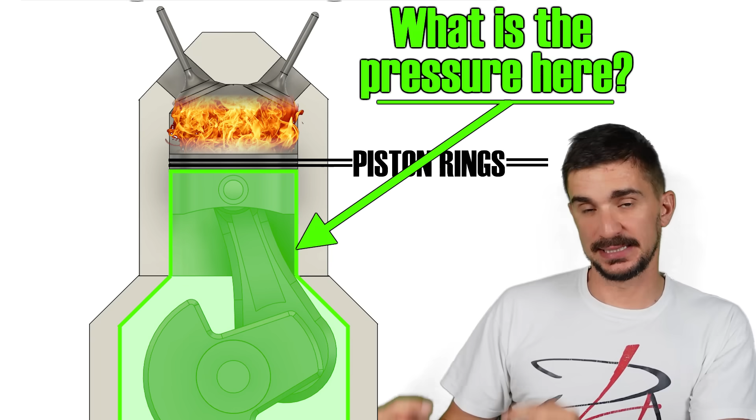Allow me to start this video with a question. Here we have a running 4-stroke engine, and let's imagine combustion is occurring inside the combustion chamber, above the piston rings. The question is, what is the pressure below the piston rings inside the crankcase? Is it A, the same as atmospheric pressure, B, higher than atmospheric pressure, C, lower than atmospheric pressure, or D, all of the above?

Time's up. The answer is D, all of the above. How can it be all of the above? It can be all of the above because pressure inside a crankcase fluctuates. It can be both higher and lower and the same as atmospheric pressure. In this video, we're going to learn and explain why that is not really a good thing, and why what we ideally want inside a crankcase is C, vacuum, lower than atmospheric pressure.

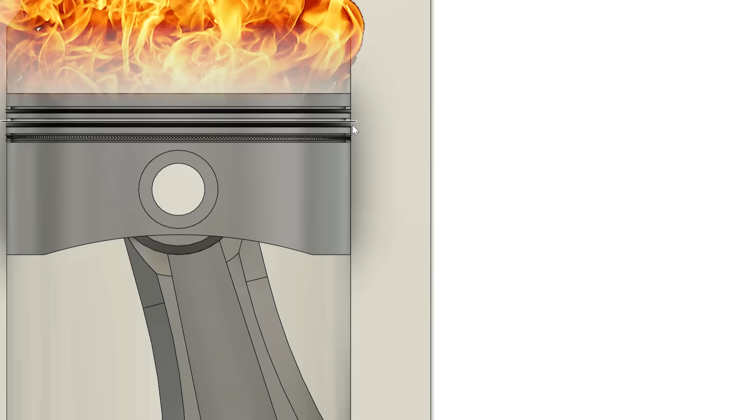So why does pressure inside a crankcase fluctuate? It fluctuates because, number one, engines have piston rings, and piston rings cannot create a perfect seal. Number two, engines have a PCV, or positive crankcase ventilation system. As combustion occurs inside a cylinder, there's always a little bit of blowby, meaning tiny amounts of combustion gases escape past the rings and go into the crankcase.

As these gases accumulate inside a crankcase, they increase the pressure inside it. If we allow these gases to increase without control, then the pressure would increase without control and we would blow out seals and send dipsticks flying out of the engine.

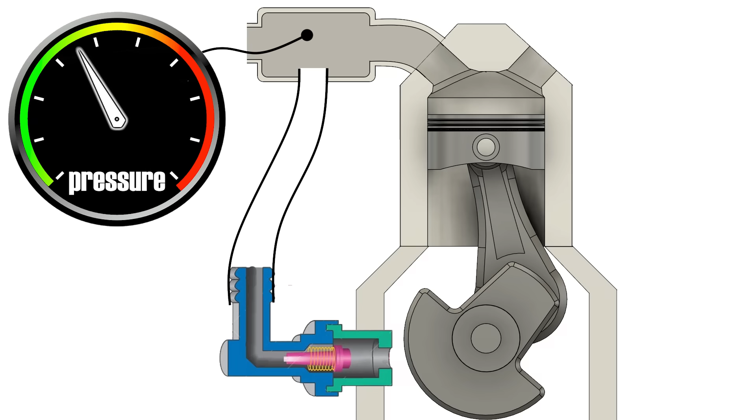This is why we have a PCV. A PCV is a simple system that essentially consists of some hoses and a valve. The hoses are connected to the crankcase and the intake manifold, and the valve sits in between. The valve opens and closes depending on the pressure inside the intake manifold, and allows excess pressure to escape from the crankcase and these gases to be recirculated back into the engine.

So basically, when the PCV valve is open, the pressure is slightly below atmospheric, and when the PCV valve is closed, pressure is slightly above atmospheric. In reality, crankcase pressure constantly fluctuates as RPM and manifold pressure change, but these fluctuations are absolutely minimal. While this is technically the correct answer, crankcase pressure can typically only go something like 5 to 10 millibar above and below atmospheric.

So technically, D is the correct answer, but really you wouldn't be wrong even if you answered A, atmospheric pressure, because the fluctuations are absolutely minimal. But as we said, that's not ideal. What we ideally want is C, vacuum, and we want significant vacuum, something like half a bar of vacuum if possible. Of course, a conventional PCV system can never hope to achieve anything near that. The only thing that can achieve such high vacuum is a dry sump system.

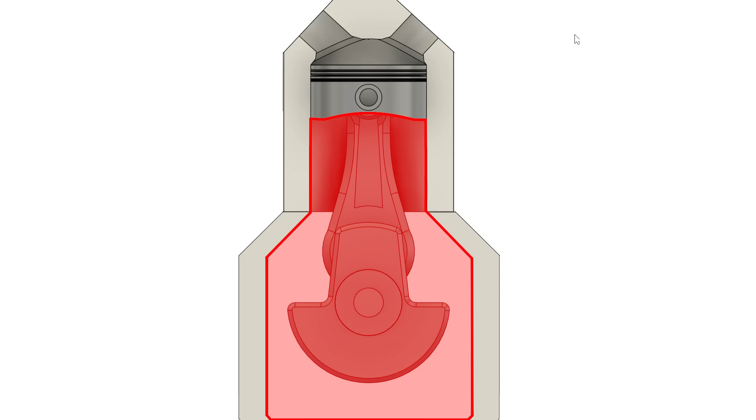So why do we want vacuum inside a crankcase? Because vacuum in the crankcase means more power. If you observe an engine in operation, you will see that the volume of the crankcase is constantly changing. This is the volume of the crankcase when the piston is at top dead center, and here's the volume when the piston is at bottom dead center. As you can see, these volumes are very different.

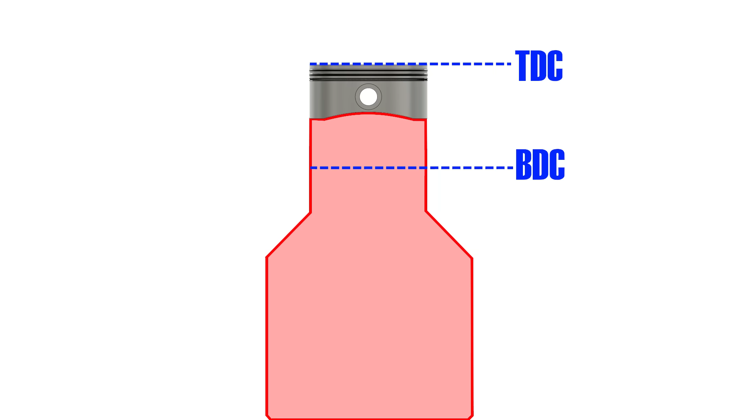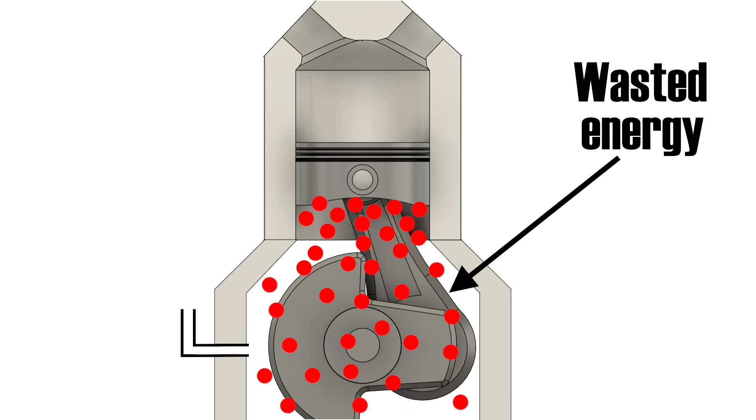This tells us that when the piston goes from top to bottom dead center, it must work to push a large amount of gas through the PCV or crankcase breather. Of course, it's impossible to push a large amount of gas through a tiny hole rapidly, so the piston ends up wasting some of its energy on compressing the crankcase gases and increasing their pressure.

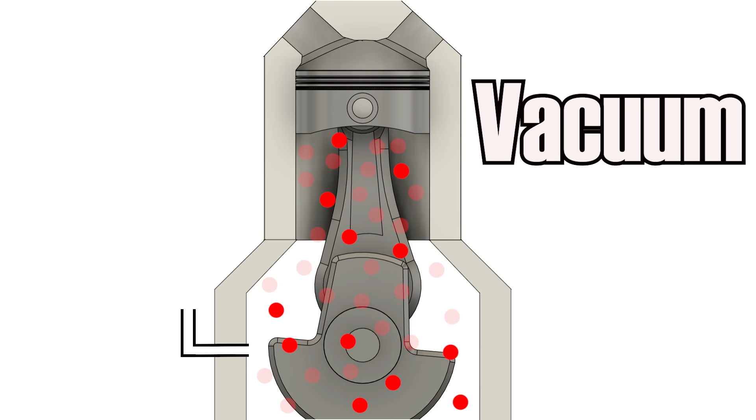This can be especially problematic on engines like 360-degree twins or boxer twins, where we have a massive change in crankcase volume because both pistons are at top and bottom dead center at the same time. But if we create vacuum inside a crankcase, then there's a lot less gas to compress and much less energy wasted. In fact, energy is gained because now the downward travel of the piston is made much easier. A vacuum means there is much less resistance.

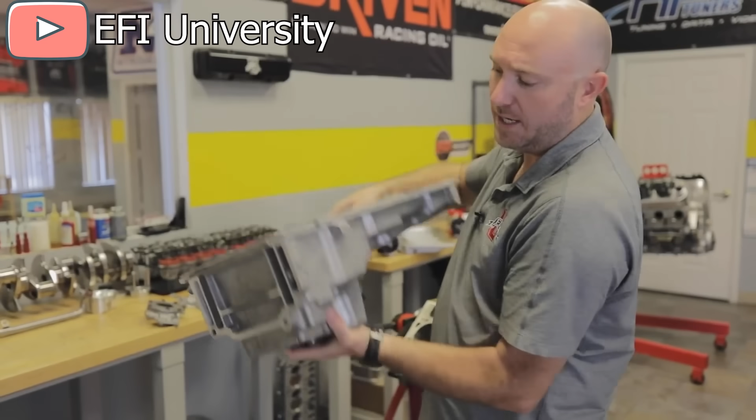This is why if you throw something in space, it will keep traveling at a constant speed forever. There's no gravity and there's no air resistance. Outer space is a perfect vacuum. And how does a dry sump system achieve vacuum in the crankcase? By sucking everything out. So instead of a traditional deep wet sump that stores all the engine oil, we are going to have a very shallow sump or oil pan.

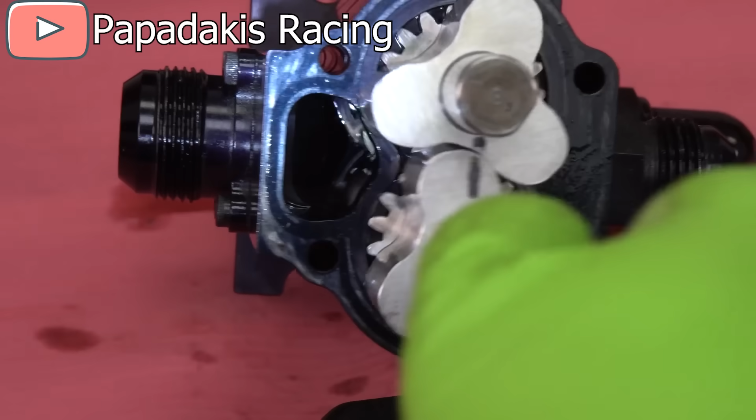Instead of an internal oil pump, we will have a belt-driven external oil pump hooked up to the crankshaft pulley. So the pump runs whenever the engine runs, and pump speed and pressure increases as engine RPM increases, just like a conventional oil pump.

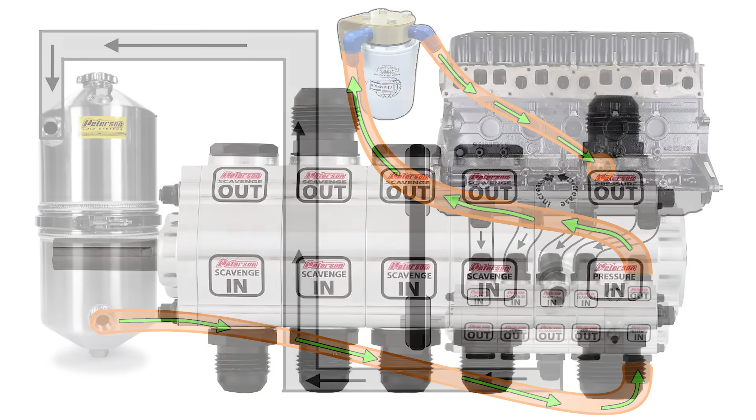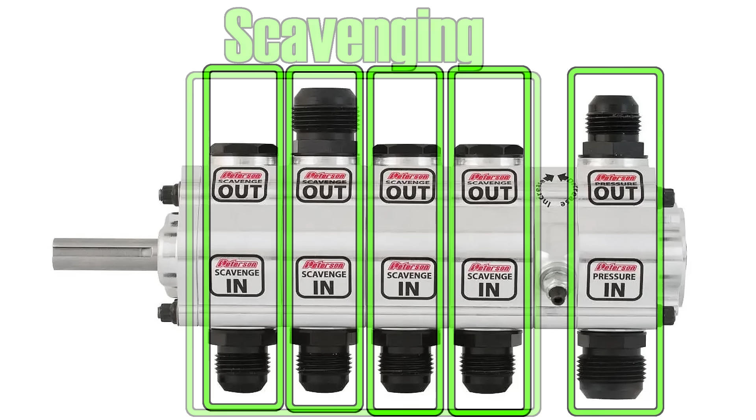This external pump scavenges or sucks oil out at multiple spots in the shallow oil pan, and then sends that oil into an external oil reservoir. At the same time, it takes oil from that reservoir, pressurizes it, and feeds it back into the engine. These are called pump stages. The first one will almost always be pressurization, and the remaining ones will be scavenging or suction. The more stages we have, the higher the vacuum inside a crankcase we can create.

Okay, but this looks like a lot of extra parts and hoses and complexity just to achieve crankcase vacuum. Is it even worth it? Yes, it is, because crankcase vacuum is just one of the many benefits that a dry sump system achieves.

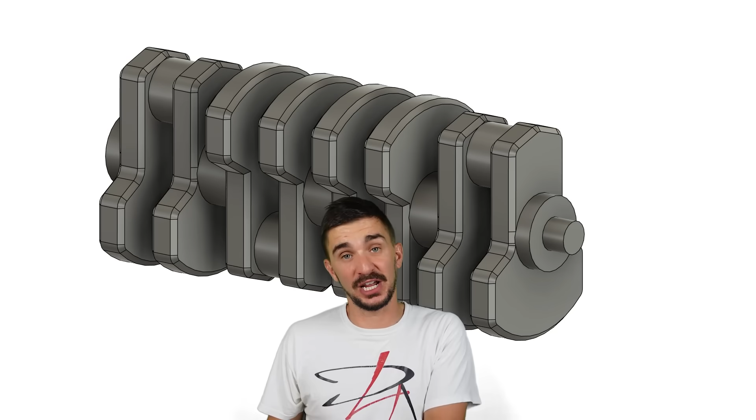The next important benefit of a dry sump is that it makes the life of the crankshaft a lot easier. If you ever opened a car window on the highway and stuck your hand out, you have probably noticed how air resistance acts against your hand.

Typical legal highway speeds are between 120 to 130 km per hour, but the crankshaft spins even faster. Depending on the RPM and the radius of the crankshaft, a point on the edge of the counterweight can reach speeds of 200 km per hour or even higher in some cases. So you can imagine the air resistance the crankshaft faces all the time.

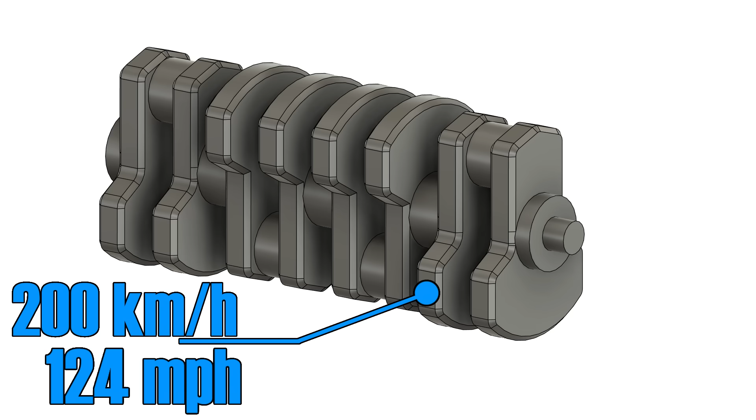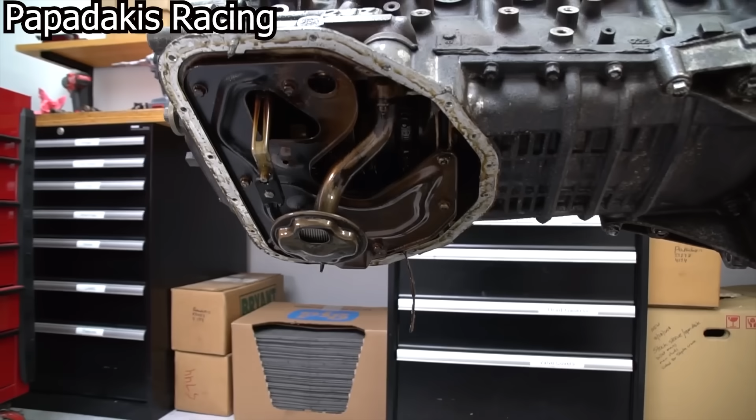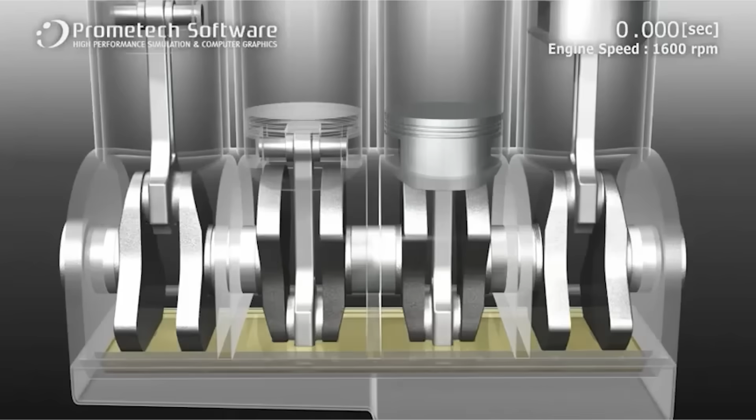But the problem is made much worse by the fact that the crankshaft doesn't spin in an environment of only air. In a conventional wet sump system, the oil drains from the rotating assembly down into the sump through the force of gravity. As the oil falls down, it of course passes by the rapidly rotating crankshaft, which then acts like a blender and creates a chaotic tornado of air and oil.

So the counterweight edges traveling at 200 km per hour have to push through this environment of air and oil droplets all the time. This, of course, is another power-reducing loss.

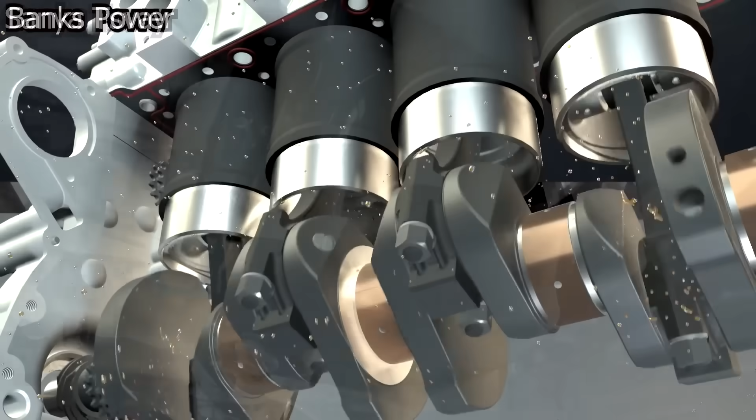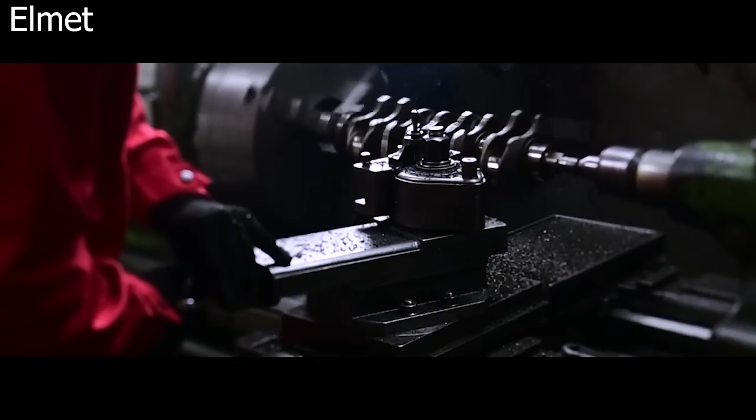This is why some people modify their crankshaft through what is known as knife edging. They cut the ends of the counterweights to hopefully make them more aerodynamic and reduce windage losses. And while this can help in some cases, it is ultimately a band-aid fix because it does not address the source of the problem. But a dry sump system does.

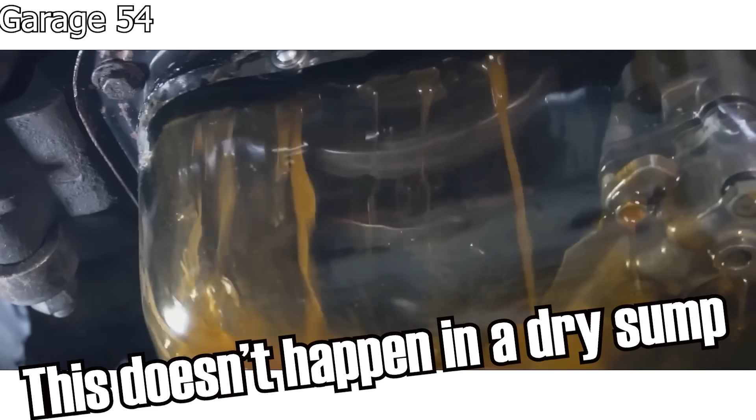In a dry sump system, the oil does not stream down from the rotating assembly via gravity. It is actively sucked out of the engine crankcase. In other words, it doesn't spend enough time, and it's not present in a sufficient quantity in order to be churned up into a froth by the crankshaft. And because we create a vacuum inside the crankcase, the crankshaft doesn't have to fight as much air resistance.

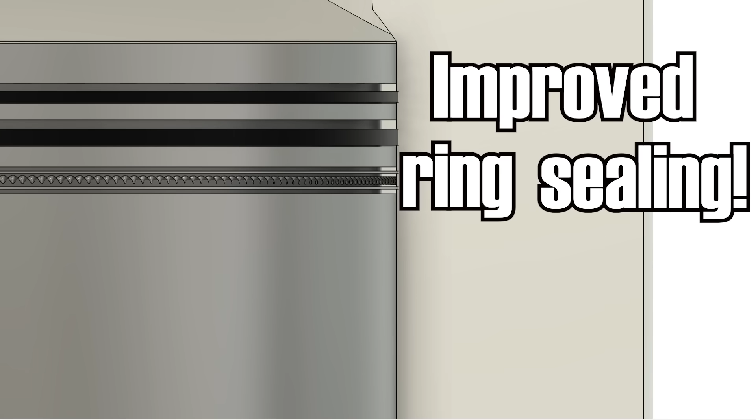But it's not just the crankshaft that benefits. The piston rings benefit as well, because a dry sump system improves ring sealing at high RPM when blow-by is highest. In a conventional engine, when the piston goes down, it briefly compresses the gases in the crankcase and increases pressure. This increased gas pressure pushes back against the piston rings, making sealing worse.

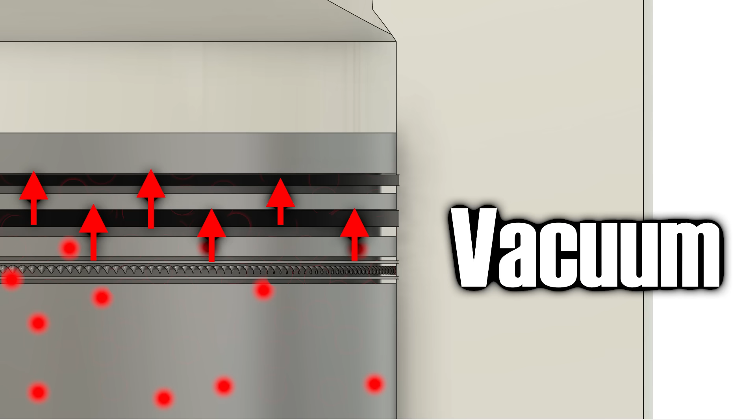But if we have a vacuum inside the crankcase, then there's nothing pushing back on the rings, and they are free to release all their tension on the cylinder, making ring seal better and improving compression and power, and also reducing emissions. All of this means that at high RPM, a dry sump system can increase peak power output by 5 to 10%, depending on the size of the engine and how much vacuum is achieved in the crankcase.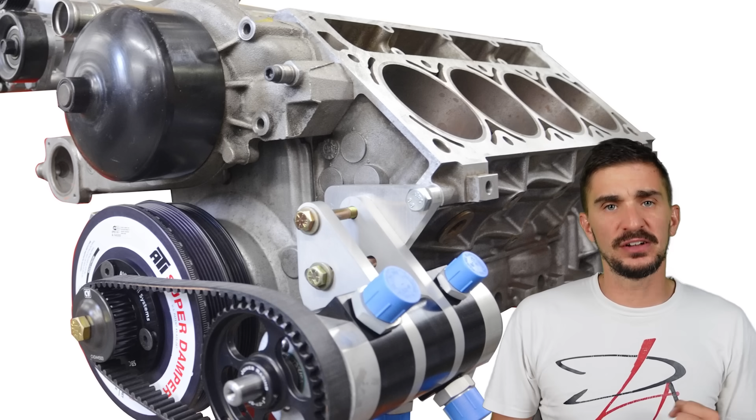So if you have an engine making 500 horsepower, then you can increase peak power by anywhere from 25 to 50 horsepower. And this is made even more impressive when you consider that the dry sump system is essentially a parasitic loss. It is a belt-driven pump.

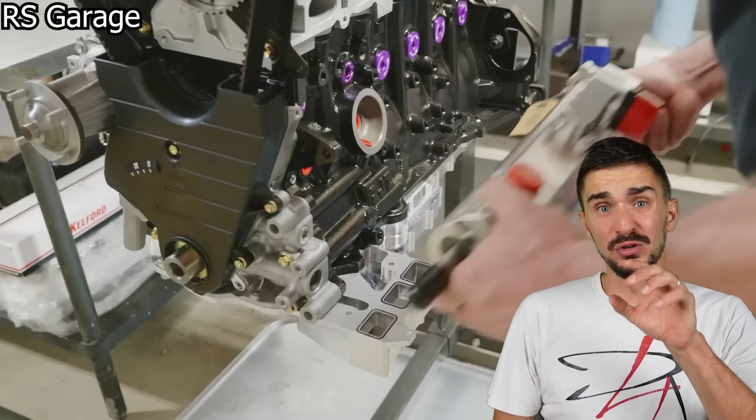A multi-stage setup is especially bad because it has multiple pumps on a single shaft driven by the engine. So for example, if you have a 7-stage dry sump system, then you have 7 pumps, 7 rotors on that shaft. But the parasitic loss from those 7 pumps is still less than the pumping and the windage losses inside the crankcase, which is why a noticeable net power gain is achieved.

But this is still just the beginning of the benefits of a dry sump system. Something else that's very important that a dry sump system achieves is that it helps the engine run cooler.

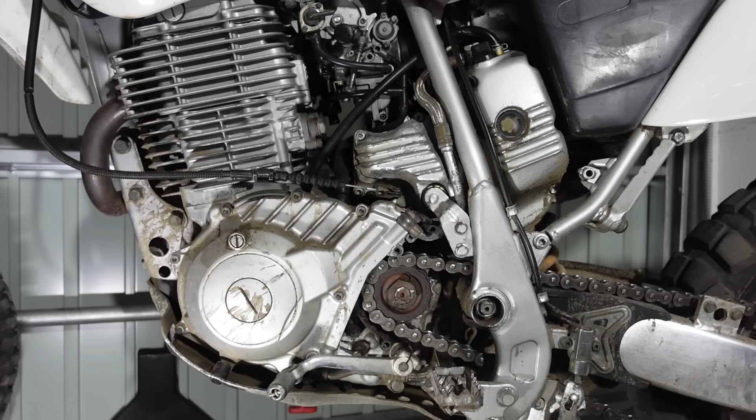This is a 2000 Yamaha TT600R and it has a super simple dry sump setup. Here's our engine and here is our external oil reservoir. Oil is taken from the engine via this hose and deposited in the tank.

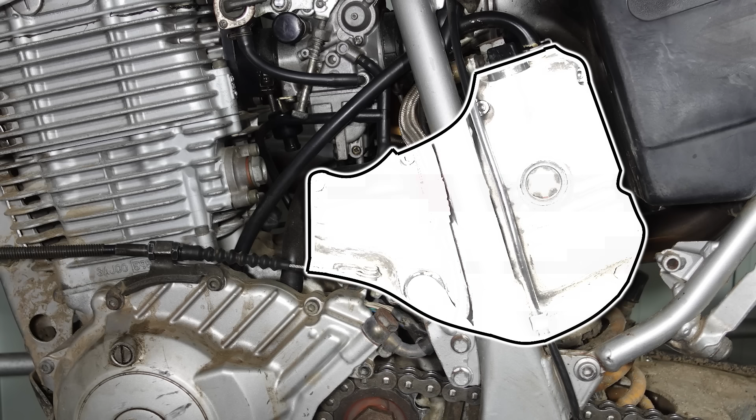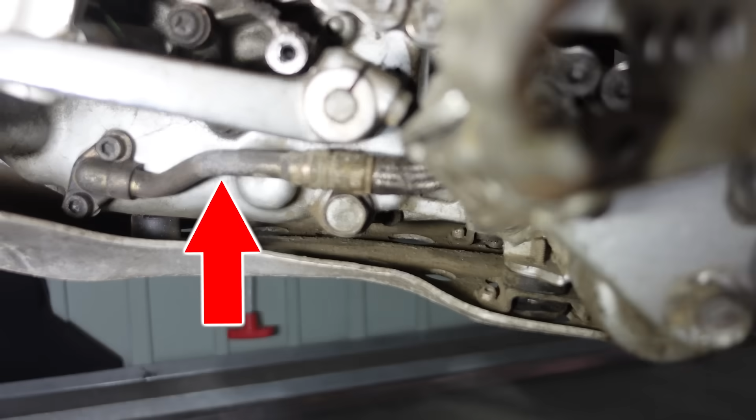The oil gets deaerated in the tank. In other words, the air and oil froth is separated into air and clean oil. The vapors return to the engine via this hose, and the filtered deaerated oil collects in the tank. From there, it goes through this hose at the bottom of the tank, back down into the engine, and then it's forced into lubrication passages by the oil pump. So basically a dry sump system just like on any other vehicle.

But the fact that here we have just one single stage pump means that this system is not capable of achieving significant vacuum in the crankcase, which means that here the goal isn't to increase power. Here the goal is to increase oil capacity.

This is a 600cc engine, but it has 3 liters of oil capacity. Compared to my daily driven Kia, which has a 1.6 engine, but only 4 liters of oil. So a 166% larger engine only carries 33% more oil.

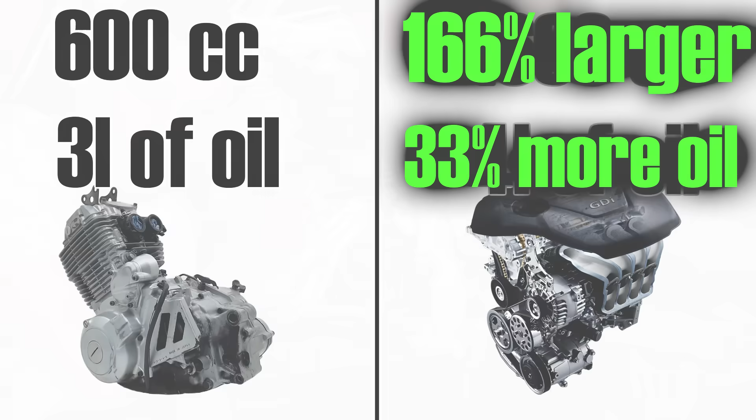An air-cooled off-road motorcycle like this one greatly benefits from increased oil capacity because it takes more energy, more heat to overheat a larger quantity of oil. Just like it takes more heat, more energy to boil 3 liters of water than just 1 liter of water.

It's pretty obvious. A bike like this has been designed to traverse rough terrain at slow speeds, and it's air-cooled. That sounds like a recipe for overheating. So we get an external oil tank to carry more oil to prevent overheating. And I have recently confirmed this because I have traversed some pretty rough terrain on a very hot summer day, more than 30 degrees Celsius, and this bike never showed any signs of overheating.

Another, just as illustrative but probably much more famous example of increased oil capacity through dry sumps are classic air-cooled Porsche 911s. They had air-cooled flat-six engines in the back, so not very good airflow by the anatomy of the vehicle. These engines had a displacement of anywhere between 2 to 3.8 liters, but they all had dry sumps and an oil capacity of anywhere between 9 to 14 liters of oil to ensure that the engine never overheats.

But wait, there's more. It's not just more power and temperature control. Another benefit is engine protection. The easiest way to kill an engine is to starve it of oil. And in a conventional wet sump system, an engine that is properly filled up to its specified oil capacity can still be starved of oil.

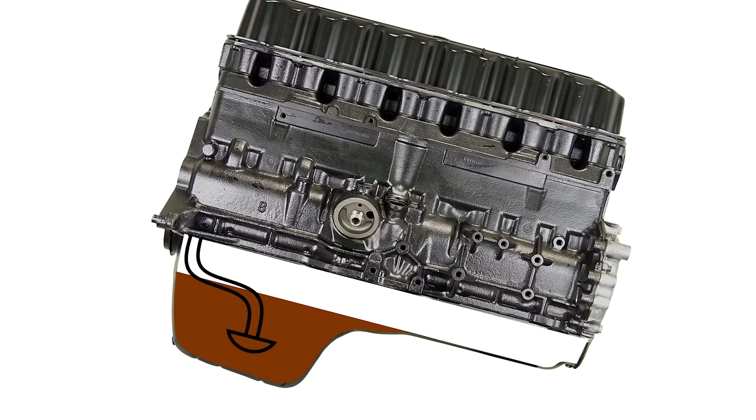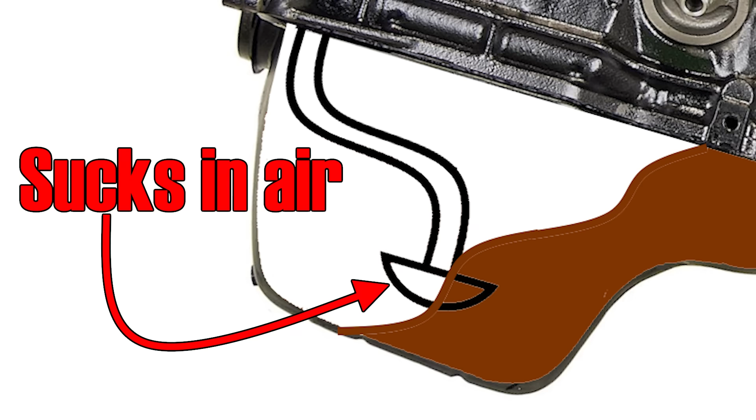Here's our engine, here's our sump, here's our oil pump pickup, and here's our oil. Now let's imagine our vehicle brakes very hard. When that happens, all our oil will be pushed to the front of the sump, and during those short moments, the oil pump will ingest air through the pickup tube, leading to temporary oil starvation and potential engine damage.

Of course, the same thing can happen during hard cornering, when all the oil gets sloshed to the side, or during very hard acceleration if the vehicle is capable of it, when all the oil gets pushed to the back of the sump. Now, sump baffles, they can help with this, but they still do not address the source of the problem, and that is the fact that the oil pickup must be fully submerged in the oil at all times to guarantee oil delivery.

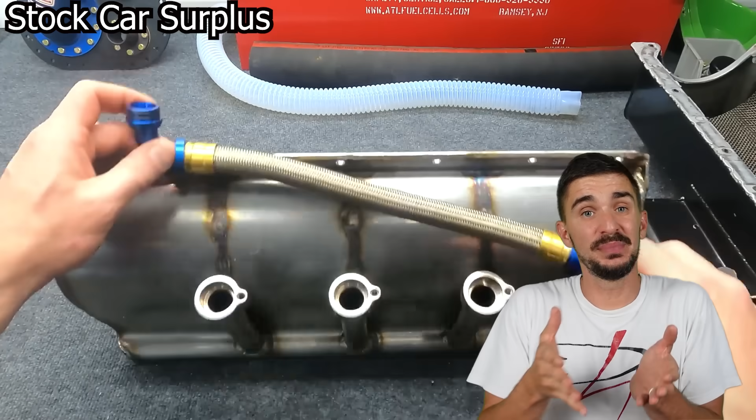A dry sump completely eliminates this problem because it eliminates the need for an oil pickup. Instead, oil supply is guaranteed at all times and in all conditions, regardless of the G-forces acting on the engine.

A really good example of an application where dry sumps are absolutely critical is aerobatic airplanes. Upside-down flying, extreme climbs, Cuban-8s, and all kinds of rolls and loops would all easily kill any wet sump engine within seconds. This is why all aerobatic airplanes rely exclusively on dry sump lubrication systems.

No, we are not done yet. There's more benefits. Something else a dry sump can do is increase your redline. A 4-stroke engine typically has a redline in the first place due to 3 reasons.

Reason number 1 is usually valve float. At a certain RPM, the valve springs can no longer guarantee that the valve closes fast enough, and so we have contact between the valve and the piston leading to engine damage.

Reason number 2 is usually that a rotating assembly is not designed to sustain forces beyond a certain RPM. And reason number 3 is that your oil pressure starts falling off.

Number 1 and number 2, we can solve those with hardware changes. We get stiffer valve springs and or maybe some other components in the valve train get upgraded. For the rotating assembly, we get stronger components, we balance them, and those delay catastrophic events further higher up in the rev range. Number 3 can only be resolved truly by a dry sump system.

In other words, it creates a perfect air and oil mix - they are perfectly mixed together. But the oil pump is not designed to work with an air and oil mix; it wants just oil, because oil is not compressible, it's a liquid, but air is compressible. So at high RPM, the oil pump sort of partially compresses this air and oil mix instead of maintaining desired oil pressure, and oil pressure starts falling off. At high RPM, you definitely do not want your oil pressure to start falling off.

Again, a dry sump fully solves this because it sucks out all the air and oil and moves it to a separate tank. There, the oil gets de-aerated, it calms down, it cools down, and only then it gets sent back into the engine.

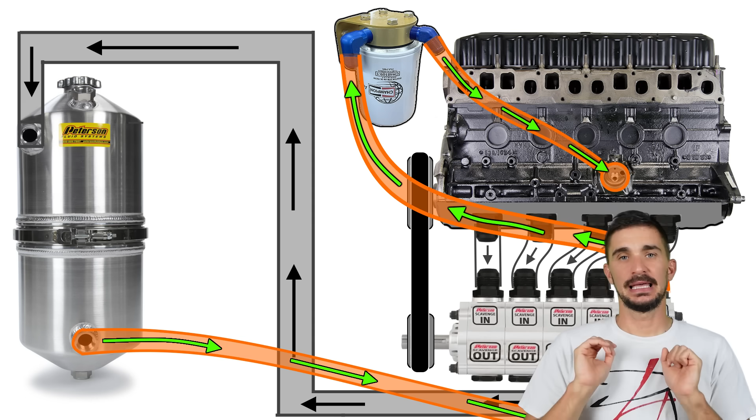Okay, just one more benefit, and then I'm going to stop: lower center of gravity. Think about it - if we replace a tall, deep wet sump with a tiny little oil pan, then suddenly the engine becomes a lot less tall. That means we can mount it lower in the vehicle, and the engine is very heavy, which leads to a lower center of gravity and better handling.

So there you go, many benefits. What are the drawbacks? None, really - the only thing I have is added cost and complexity. I often mention added cost and complexity as a drawback in my videos, but when it's the only drawback, it's kind of lame. It's like drinking water with your hand, and then drinking water with a cup, and then saying for the cup the drawback is added cost and complexity because you have to buy a cup and keep it somewhere when you're not using it. In that case, that's the drawback of every material object ever made. Stupid.

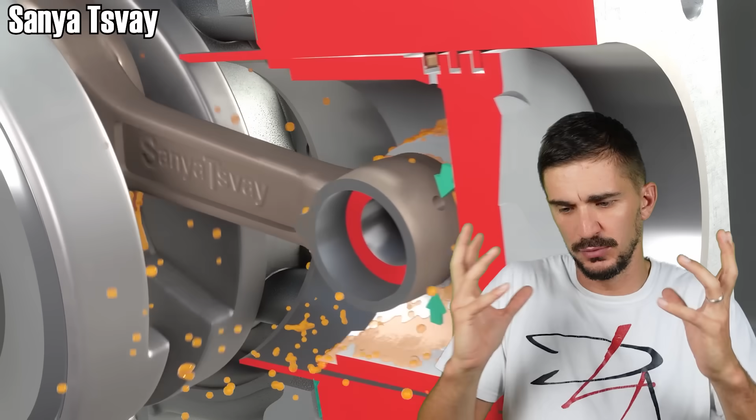I got one - it's not really a drawback, but it's all I have: wrist pin lubrication. If your engine relies solely on the presence of the wet sump and the splashing around of the oil to lubricate the cylinder and mostly the wrist pin, then installing a dry sump will require you to somehow ensure proper wrist pin lubrication. In reality, you're going to be very hard-pressed to find an engine like that, especially nowadays.

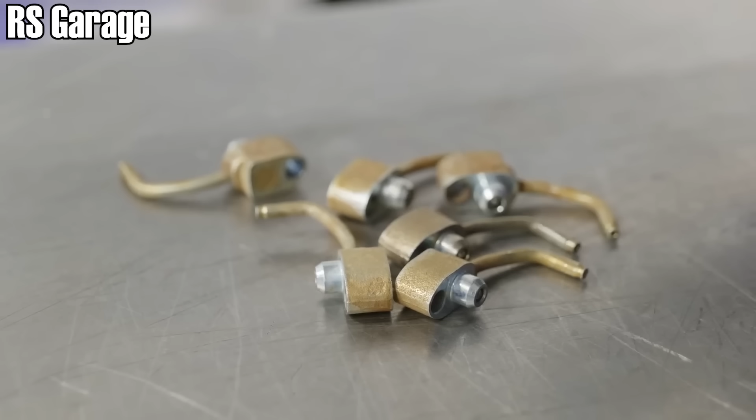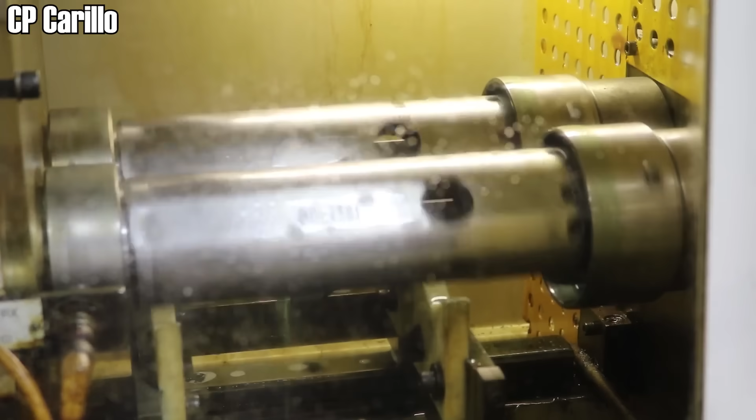Most engines have dedicated wrist pin lubrication nowadays through one of the following means: they either have a notch on the con rod so oil can be spat up into the wrist pin, or squirters on the underside of the piston to lubricate the cylinder, the wrist pin, and the underside of the piston, or maybe oil-drilled con rods so oil goes from the big end right into the small end and lubricates the wrist pin as well. There's going to be something. But if there isn't, and you put a dry sump on it, then you're going to have to install one of these to lubricate the wrist pin again.

That's the best I can do for a drawback - it's not a real drawback. So, if there's no drawbacks, why aren't dry sumps in every engine? Well, the answer is pretty obvious: added cost and complexity. You're going to find dry sumps in some vehicles from the factory.

But it's going to be stuff like Ferraris, I believe the V10 BMW M5 - yes, that has a dry sump - some Audi R8s, I think, some Z06 Corvettes. What else? Lexus LFA has a dry sump, some Porsche GT3s, I believe. Basically, cars of that caliber.

You're not going to find it in your daily driver, regular family hatchback thing, because the benefits cannot be justified, and these cars cannot reap most of the benefits because, for example, they simply can't achieve the G-forces that justify a dry sump. They aren't designed for prolonged high RPM operation, nor can they rev high enough to benefit as much from a dry sump. The added 10% or 5% of power, again, doesn't justify the cost.